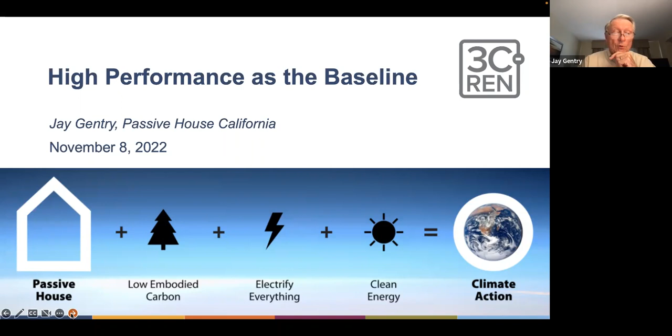I'm wearing different glasses there, but I look about the same, I hope. I went to UCLA. I'm a Vietnam age person, so I picked flying instead of marching. And I've been a marketing and sales consultant pretty much my entire career once I got out of the Air Force. I've been focused on the building performance industry, or the emerging industry, it's now really rolling full tilt, for some years. I'm on the board of Passive House California, and I'm semi-retired, although hardly retired is the way my wife describes it.

I spend most of my time advocating, doing this sort of thing for high performance design and building. Passive House California, in case you don't know, is an organization affiliated with the North American Passive House Network and Passive House Institute, or Passive House International. Our mission is to promote awareness, understanding, and application of the high passive house standards for envelope. We do it through events, education, things such as this, in an effort to get everyone to know and move in this direction, which is an important part of going forward into the future.

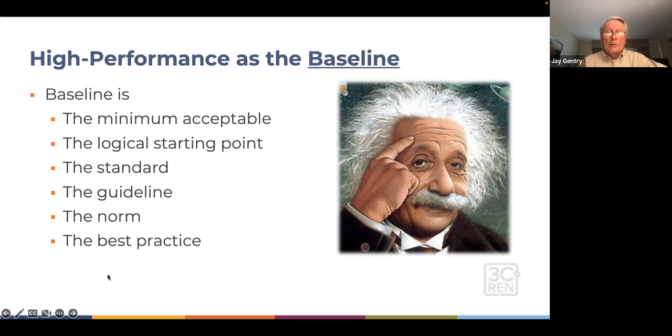I thought it was good to give you something that you can spend a little more time with than just listening to me about it. High performance as the baseline - I found it interesting when I looked up the word baseline and found that it means the minimum acceptable. I love that for Passive House. The logical starting point, that too. The standard to which we should be building things, the guideline, the norm, the best practice - that's what I mean by baseline. Passive House represents a piece, not all, but an important piece for the energy efficiency that contributes overall to sustainability and environmental responsibility. So that's what we mean by baseline.

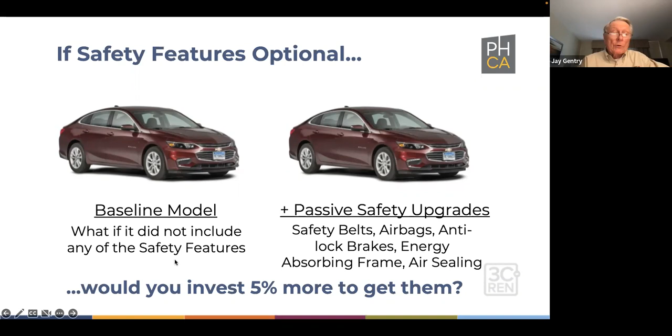Because it's the right smart thing to do, the baseline model includes safety belts, airbags, energy absorbing frame, and many more things. The upgrades you get are your sound system, radio, leather upholstery, video, things such as that. That's what I mean by baseline, rather than the dressed up or fancied up model. The same thing should be true, ultimately will be true for buildings, that the baseline will bring in all of the positive things that make it the smart decision.

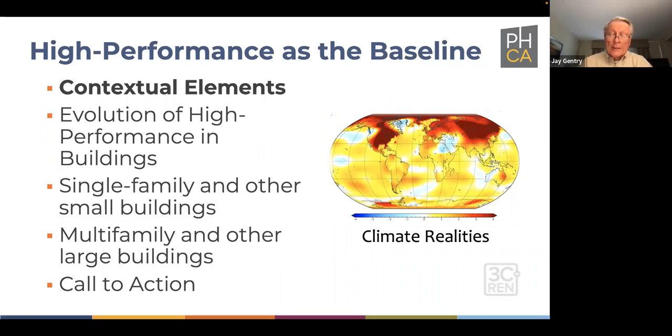Today we're going to talk about, I'll set the context for just 4 or 5 minutes at the beginning, and then we're going to talk about how high performance has evolved, the evolution of high performance in buildings and what the parts and pieces of that represent. We will focus primarily on single family and other small buildings, but I do have some slides on multifamily, and some hidden slides if some of you are multifamily involved and would like to get a little deeper into some things in a climate, if time is available, we can do that. And then the final thing will be a call to action, some things you can do if you're interested and if what we've talked about today makes sense to you as a path going forward.

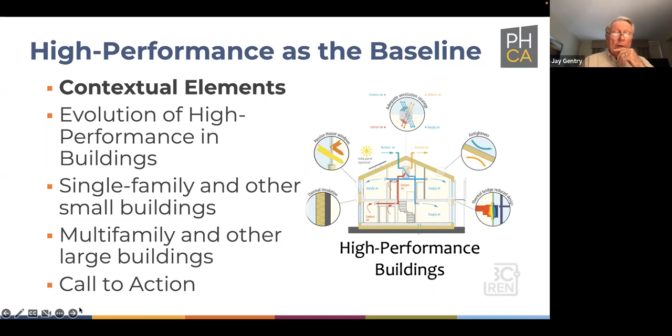The contextual element: high performance is the baseline. A high performance building is generally primarily airtight, thermal bridges removed, airtight including the windows and doors, sufficient strategic insulation that's there, and fresh air ventilation with heat recovery. Those are the things that go into it. Going again into the contextual elements, that's the high performance as the baseline.

The reality is that the climate crisis is here. Greenhouse gases from human activities are a primary issue, and the embodied and operational carbon from the built environment are major contributors. We need to go forward, maximize efficiency, minimize carbon, and shift to renewables. Unprecedented action is what is required now and into the future. You, by being here today, are a part of that unprecedented action, but we have a lot more to do.

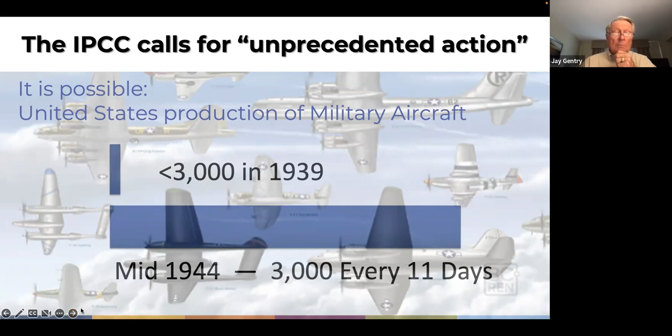A good comparative to that, in my mind, is in the year 1939, the entire United States military produced slightly less than 3,000 military airplanes for military use. And by 1944, we were producing 3,000 airplanes every 11 days. So it is possible. And as we ramp up, we are ramping up dramatically, at least primarily in the developed countries around the world, we're ramping up and headed in the right direction. And Passive House is clearly a part of that.

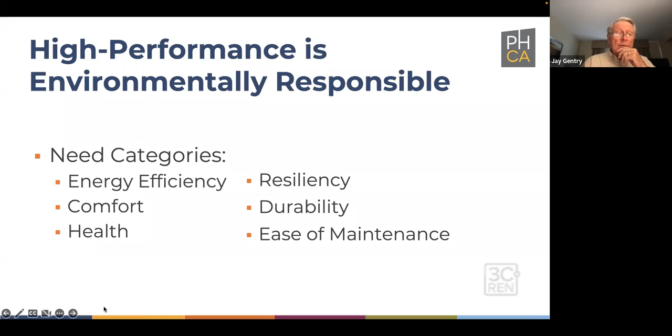The high performance is environmentally responsible, and we talked about this particular thing before. So when we talk in terms of environmentally responsible, there are some categories associated with it: energy efficiency, comfort, health - these from the inside - resiliency, durability, and ease of maintenance are pieces of it that are there.

So for occupants, if you live or work in the building and pay your bills, the energy bills are minimized. It's much more comfortable, both thermally and acoustically quiet. It's a comfortable place to be in a high performance building. You get fresh filtered air with minimized pollutants, allergens, and toxins, and resilience to heat, cold, fire, smoke, and power outages. It is a safer building to live in. So for occupants, it makes sense.

For owners, there's the same operational expense minimized, but the structures are more durable. The mechanical systems, because they're smaller and more right-sized, tend to last longer. Moisture management is very important and much easier when you have the air tightness associated with high performance. Your maintenance expenses are generally reduced, and it's increased fire resistance. So a lot of good things about high performance if you're the owner of the building.

And if you are here, click it here. Or my computer is struggling with going. I don't know if you can see the little spinning rainbow. I'm not sure what happened.

For communities, high performance building communities - there's a community in Colorado that's building back all to passive house because the houses not only all burned in a wildfire last year, the burning transferred from home to home to home. They'd like to get them all built so they're more resilient, because if you don't catch one on fire, it's hard to catch the rest of them on fire.

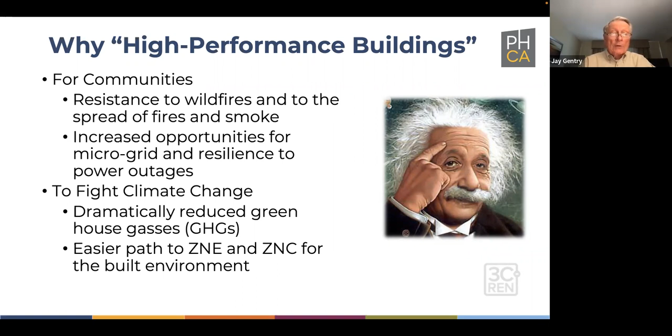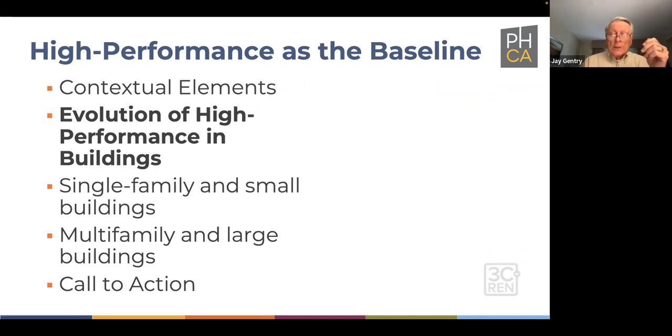We'll now step into the evolution of high performance buildings—how we came around and stepped into this, and into where we're going. It started a long time ago by making intelligent and smart choices about where you live, and it continues on now as we go forward.

Looking at the cave dwellers—if you go worldwide, where they've hollowed out dwellings themselves, what they looked for was, in the northern hemisphere, a high percentage are south facing, because the winter sun is low in the sky and comes in to help warm them during the cold time, while the summer sun is higher in the sky, so it doesn't get in as much and doesn't overheat them.

In addition, they chose locations that provide access to water, comfort, safety, and visibility. I'd point out that a lot of these things are passive, because once they hollowed out the place they were going to live, they could pull up the ladder, making it safer and more difficult to attack, and they could see others coming if they needed to.

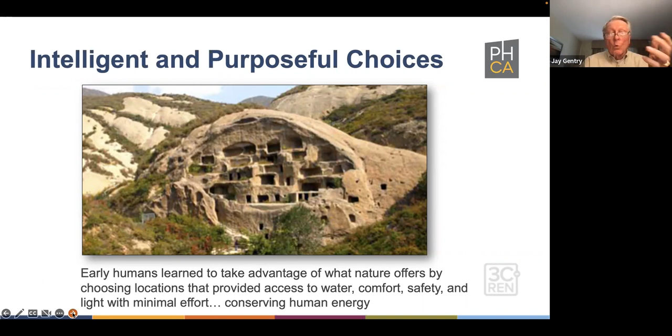So we've been making these intelligent and purposeful choices for a long time, and it was about conserving human energy, staying close to water, and those kinds of things. It was really about survival at that time.

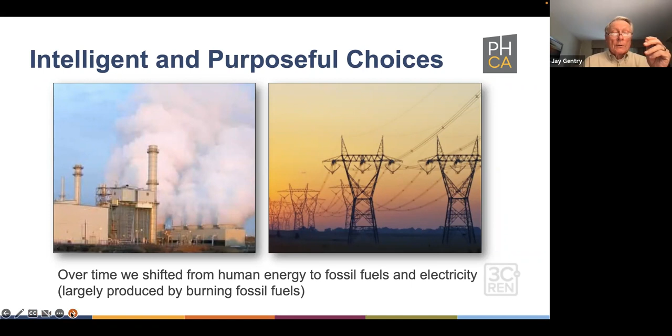Over time, we switched from human energy to energy from fossil fuels and electricity, which is still largely produced by burning fossil fuels. Because of that, we now know we need to do other things—we need to decarbonize the built environment by maximizing efficiency, minimizing embodied carbon, electrifying everything, and shifting to renewable energy. We need to do it because survival is back on the table.

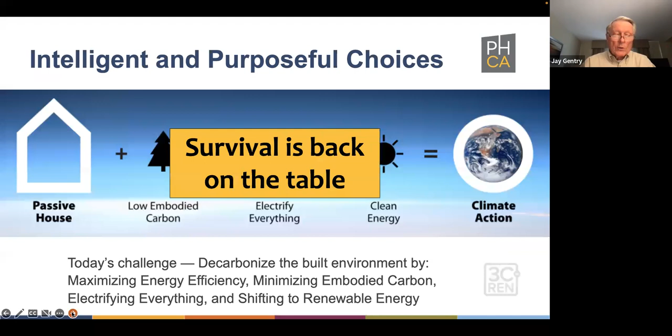This is really critical—one of the contextual things I wanted to bring up, in terms of why we haven't done more, or where we could be had we done more.

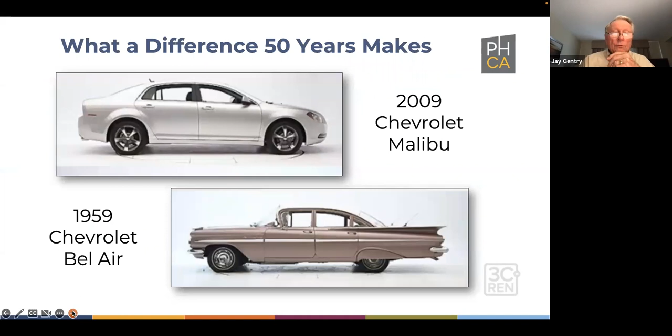You can look this up on YouTube: the 2009 Chevy Malibu crash test against a '59 Bel Air. It's a very interesting video, because the '59 Bel Air is much heavier and somewhat longer, but it doesn't have all the improvements made up to 2009. What you wind up seeing is that the 1959 car is longer and heavier, but the new baseline for code includes all of these safety features.

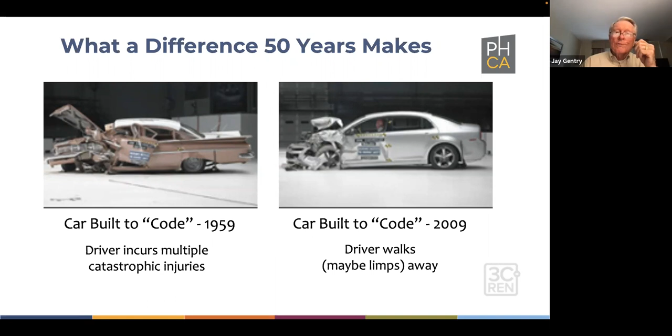The result is that the driver of the '59 car incurs multiple catastrophic injuries in the way the car collapses. But because of the airbag, seat belts, collapsible frame, and other features in the newer car, the driver walks away, or maybe limps away—there might have been some damage to one or both feet.

Interestingly, a key driver of making cars better over those 50 years was the insurance industry, because they wanted lower payouts, fewer fatalities, and similar outcomes. So they insisted on clarity of performance related to goals and objectives for safety.

They applied analysis and incorporated science to achieve performance and different safety things. They integrated innovative solutions, and then made all of the auto companies commit to delivering the expected results. There's no reason we couldn't do that in the building industry, or in home development and construction, as we add the goals of high efficiency and low embodied carbon. We know how to achieve them. It isn't that we don't know how, but we didn't have Ralph Nader and Unsafe at Any Speed to set the stage for the insurance industry to drive and make them happen. We are starting to make them happen, or more than starting, we are moving forward on making them happen worldwide, because it's the smart thing to do.

Setting the right goals, as we've discussed. So it's not driven by regulation yet, but we're getting closer to having it driven by regulation. In terms of the evolution, in the 60s we had the Environmental Defense Fund and Greenpeace, and we were becoming aware that mankind was driving unhealthy and unsafe changes across the planet. But we were thinking it and doing a little bit of action.

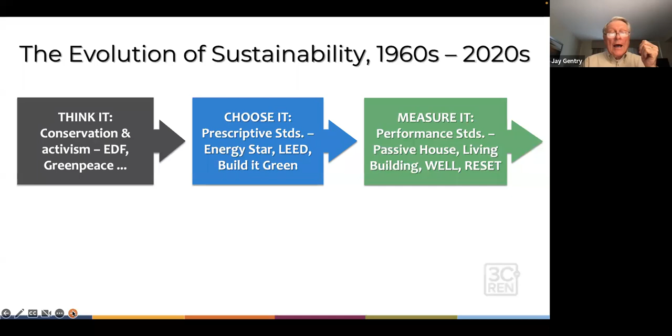And now, just recently in New York, it became, you have to prove it. I don't know if you're aware, but in New York, starting in 2024, even existing buildings—and these are for large buildings, but all existing buildings—will be provided with a budget for the amount of energy they can use to heat and cool the building overall. And if they don't get to that level of energy use, there are fines associated with it that will increase every 5 years going forward.

So they're actually making companies prove it on a year-to-year basis, and the target is high performance, which is the things we have talked about. So from a contextual standpoint, we are past the threshold and moving into the time when we can drive it and really get the unprecedented level of action that is necessary.

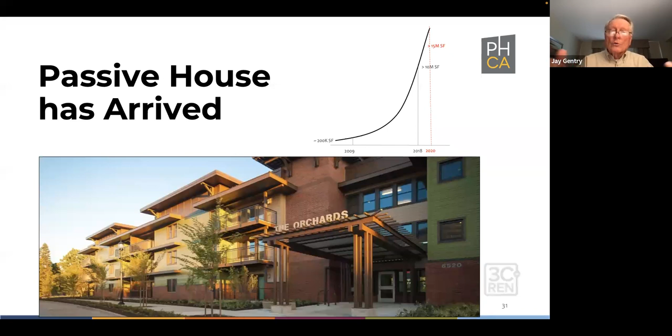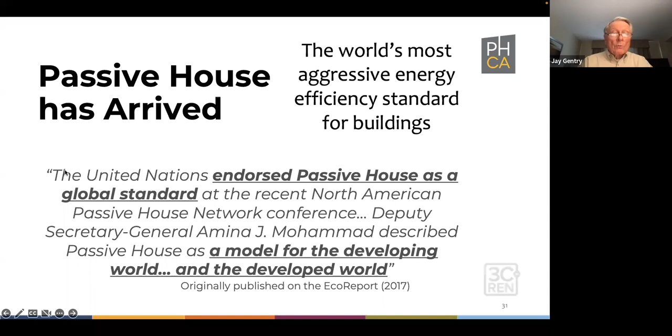Passive House, as I said, is a piece of that. I want to take a little time to share with you, for those who don't know, some of the basic concepts of Passive House and how it works. Passive House is, in fact, the world's most aggressive energy efficiency standard for buildings. A few years ago, in 2017, the United Nations endorsed and recognized Passive House as a global standard and a model for construction and existing buildings in the developing and developed world. This was published in the EcoReport in 2017. So Passive House is recognized as a piece of the puzzle.

Because it's called Passive House, people think of it as a single family home. Some people even think of it as a yurt with a window, because of the pictures of passive houses in really cold climates, where you wind up with generally less glass and things. We now, from a building science standpoint, know how to build to pretty much any style in any climate zone. Certainly in the climate zones we have here in California, you can easily build a passive house to look like any style you're looking for.

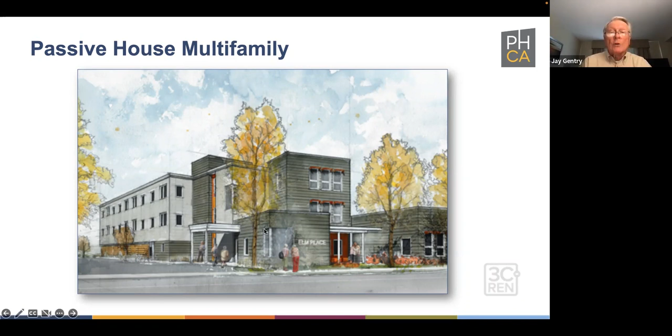And even this one is in New York. This is a passive house building, or passive house block, that is currently under construction.

When it's completed, it'll have 750,000 square feet of mixed use, 655 affordable units, commercial space, and a school. The big picture is this entire city block will operate on less than half of the energy that it would have if it had been built to code.

This is one of the reasons New York is out in the lead. Another reason is that so many people live there without cars, and they live so close and move around through public transportation, that whereas in California the built environment is responsible for around 40% of our greenhouse gases, in New York City it's closer to 70%. So it's a bigger deal for them moving forward.

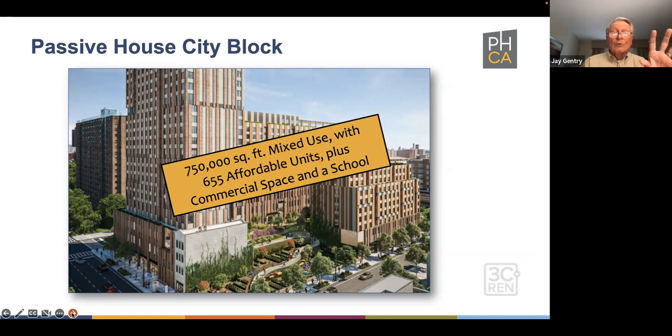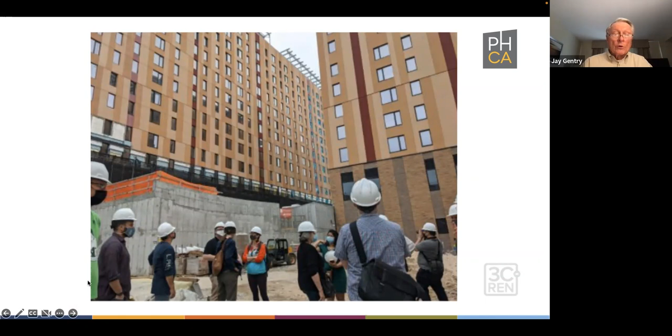And this, by the way, isn't just a picture of what it's going to be like, it is underway. This is from a few months ago. In New York, those buildings are on the way up.

So part of one of the keys to understanding passive houses is that it's passive. I mentioned earlier that when cave dwellers built their caves facing a certain direction and up in the air so you had to come up a ladder to reach them, those were all passive solutions. They built it that way to achieve certain objectives that are automatically achieved as they go. So the natural order of sustainability is to do all the things you can that are passive, that don't have to be repeated, don't have to add power, don't have to be updated or upgraded. They just simply perform the way you want them to perform. So you want to do passive things first.

Because of the airtightness and efficiency associated with it, the active systems tend to be dramatically smaller, and then you go to renewables third. Many solar companies, most in fact, will look at your energy bill and just suggest enough solar to offset it. Whereas the smarter thing to do, particularly for larger buildings, is to look at what you can do to reduce energy use and do that first. Then when the renewables come, you still get to zero, but with a lot less renewables, and it's a better overall solution.

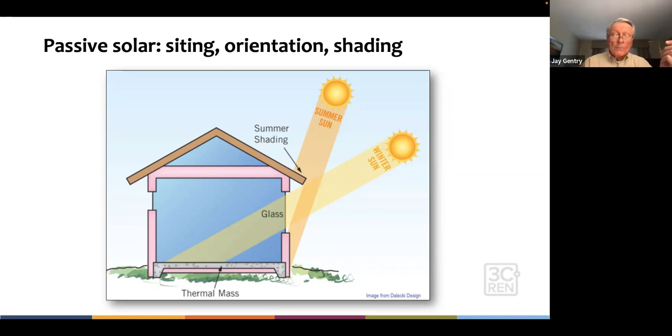I mentioned it with respect to the caves. This is a more specific example: the summer sun doesn't get to the window because of the eave, which was a passive solution. It blocks the hot summer sun and allows the winter sun in when it's cooler, and the solar heat gain from the winter sun can be brought into a thermal mass if you want, so the house stays warmer during the cold day and starts from a warmer temperature during the cold night. It's a smart passive solution because once you design it and put it together that way, you've got it. Passive solutions deliver it naturally as a function and continue to do whatever it is you want.

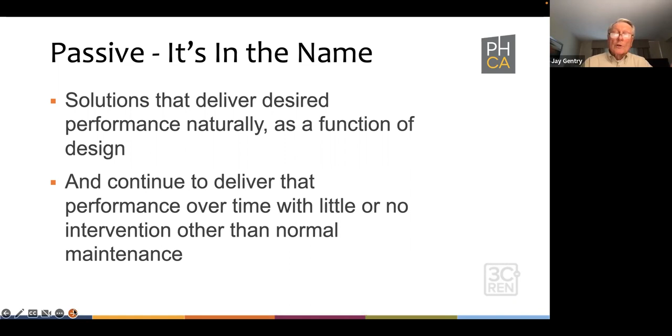I use two examples to talk about that. One is the race car. The wing on the race car performs like an airplane wing upside down, so instead of lifting the car off the ground, it presses the back down, with a little wing in front too, pressing the car down at speed. So the car feels heavier, but it's not—there's more pressure down so that when you turn, it has much better traction. You could get the same traction by putting weights in the car, but then when you try to turn, centrifugal force would tend to pull it offline. So it's an elegant passive solution that makes race cars corner faster and more safely, and it works as long as the car is operating—you don't have to do anything other than put it there correctly in the beginning. The second example I like to talk about is reverse diagonal parking, which some of you have probably seen. It's becoming more common in parks and sometimes city downtown areas.

The goal, in the same way as making the car safer, was to make it safer for passengers when they get out of the car, because when you pull the car in a forward diagonal and park, the bike rack is on the back of the car.

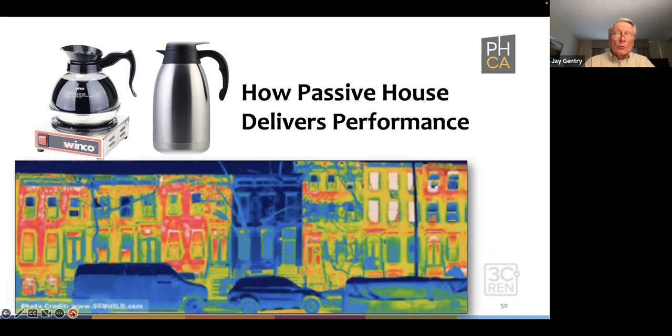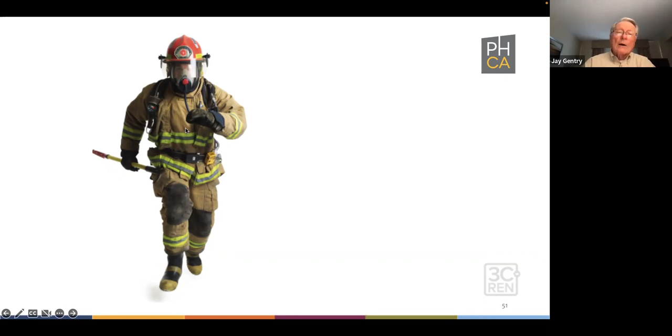How does Passive House deliver performance? It's not unlike the way you get performance if you're a fireman or firewoman running into a fire. To protect you from the hostile outdoor environment, you have personal protective equipment. The same thing is true for an astronaut, although it's not heat that's dangerous, it's the cold and the lack of oxygen. So what you get in both cases is an airtight shell or envelope, with sufficient insulation to avoid the intrusion of heat from outside or loss from inside. Both of these are insulated outfits, if you will.

You could make it airtight with saran wrap, but it wouldn't be much help in a fire or in outer space. The third thing, of course, is continuous fresh air. It's not a wives' tale, but there's an old idea that buildings need to breathe. That's true in terms of allowing moisture to escape so you don't wind up with deterioration on the inside. But buildings don't need to breathe air, the people inside do need to breathe air. So continuous fresh air, and in the case of a passive house with heat recovery, which we'll speak about in a minute, is the smart way to operate.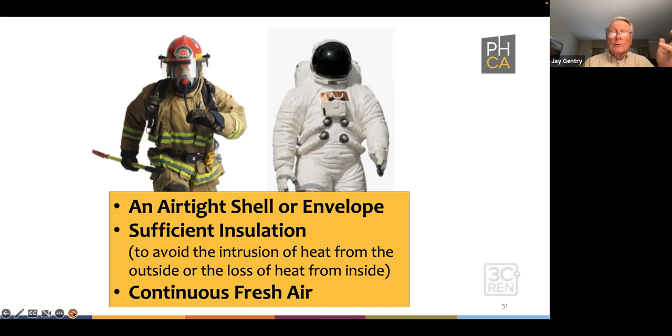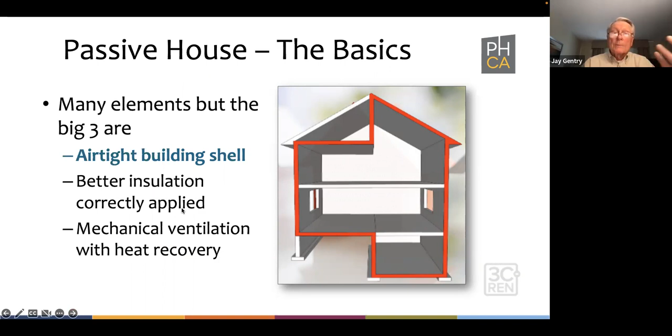This personal protective envelope is personal protective equipment for the people inside a passive house building. The basics, the three key elements: you need to figure out where your air barrier is and create an airtight building shell, including the windows and doors that are part of that envelope, which need to be airtight. The second thing is to get better insulation correctly applied so that you have strategic and climate-specific amounts of insulation going in.

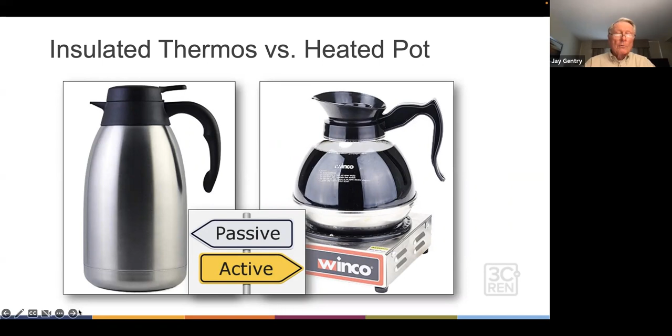As an example of thermal bridges, here are two examples, another passive versus active comparison, where you can have your hot coffee all morning and again all afternoon. You can do it with the thermos, or you can do it with this coffee pot. With the coffee pot, you've all been there when the coffee burned out, and you end up fixing it because you smell it coming from the kitchen. To do these things to the envelope, it's not magic or anything dramatically different from what we do with regular buildings.

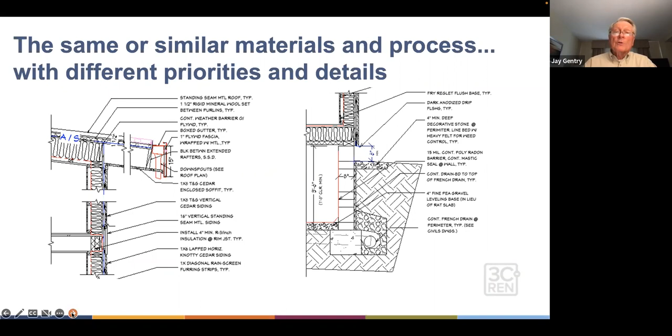It is simply just a bunch of the details that you operate with for the places where it's hard to air seal, the corners, around the windows, at the base of the building. The details associated with the sealing and insulation are important, and you want to get it all the way across. You do the specs as you're going, and you have to communicate how to do this and go forward with the contractors and everybody that is there to do it. But it is not dramatically different.

It is very much like the car in just getting the airbag, the seat belts, the things. Didn't change the appearance or performance of the car. They were simply around doing the right things.

With regard to a thermal bridge, if it's not familiar to you, this one would be: we all know not to pick up an iron frying pan that we just cooked something in without putting a hot pad on the handle, because the handle gets just as hot as the rest of it, since the heat bridges up through the iron and out into the handle.

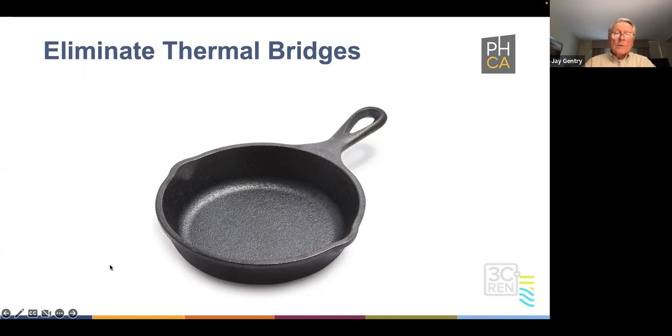That is the case with buildings as well. You can see here the heat bridging out against the top cap around the tops of the windows in particular. You can actually see the heat being generated, bleeding or thermally bridging through the studs.

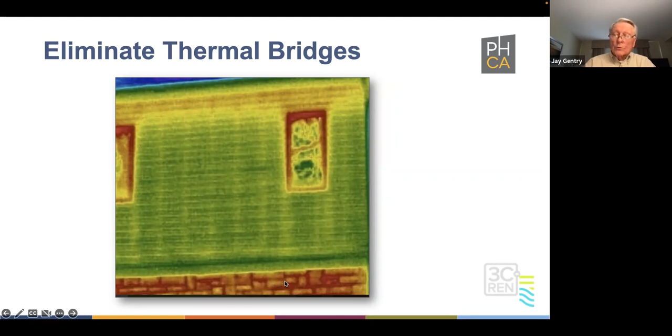And clearly underneath the house, they've got some heat issues, probably some leaking furnace, some leaking ducting, or something that's making it pretty hot underneath the house. So the bricks on the outside, or the stone on the outside, they're creating a lot of heat energy that's being washed through, that's being transferred. So they have to keep doing it over and over again.

So the second of the two big steps is strategic insulation correctly applied. And that's without thermal bridging. So you need to eliminate the thermal bridging. And the passive house planning package is one of the few places where you get that opportunity to do it.

The third step, because people need to breathe, you need fresh air inside the building. So you get mechanical ventilation with heat recovery. And generally you take the warm air inside out of the wet rooms, like the kitchen, the bathrooms, the laundry room. It passes through a heat exchanger.

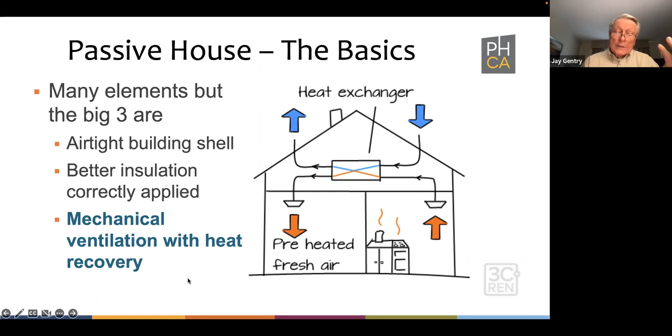So this hot air passes through the heat exchanger while the cold air from outside passes through the same exchanger. They don't mix. So the moist, polluted air that's going out, that air goes out, but the heat from that air transfers to the air that is coming in. And that's called a heat recovery or energy recovery ventilation system - that's what does that.

As you look at it here, the extract air from the stale air rooms that's going out exhausts, and the air from outside comes in.

To get an idea of it, if you have a 90% efficient heat or energy recovery ventilation system, and it's 70 degrees inside with 30 degrees outside, that 30-degree air, when it comes in, is warmed all the way up to about 66 degrees. So you're really only having to deal with a few degrees of a little bit of air that is providing, however, continuous fresh air to the inside of the home. And the air that's going out, of course, the temperature drops down in the air that's going out.

And I have two other things here. Because it's coming in, once you have an airtight building, you can control the air quality. You have complete control of it. So you can filter it to whatever level you want to. And something that's happening now quite a bit across the West is you're having a basic filtration system which works for regular times, and if there's smoke from wildfires or something else that you need to get out of the filtration, you can shift over to having the air coming in filtered through a HEPA filter, getting not all but by far most of the smoke out.

And so you think, well, this is not passive, this is active, it's going to take energy to run it, and that's absolutely true.

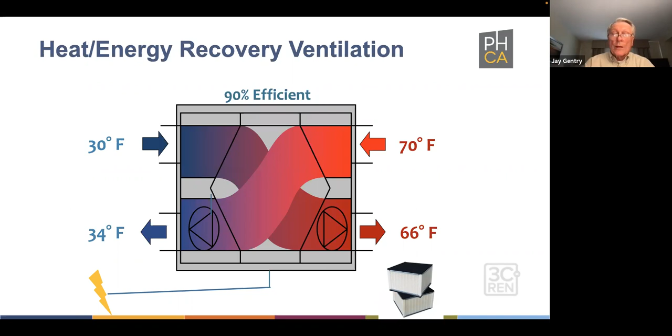Because you're transferring a small amount of air at a slow speed, just to get continuous fresh air inside, that air isn't moving fast. For a 1,600 square foot home, the energy required is equivalent to about a 40 to 60 watt light bulb. So it's very low powering of the fan, and the heat transfer takes place in a passive system structured so that as air passes through the tubing or plates, the heat transfers without the air itself mixing as it goes through.

The 5 key principles - I mentioned the 3 things: airtight, insulation, heat recovery ventilation.

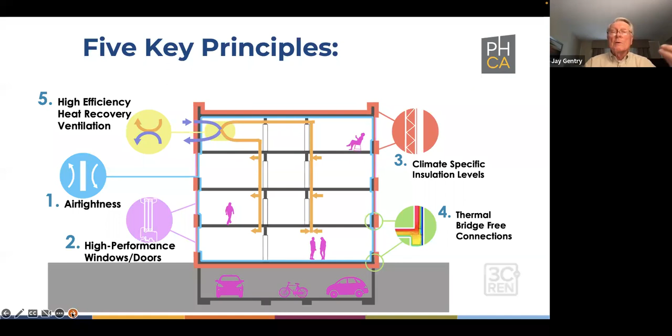Just so you know, I used a small house as an example, but here's a 4-story building. Again, you've got airtightness with high performance windows and doors for continued air tightness. You've got climate specific insulation with elimination of thermal bridges, and high efficiency heat recovery ventilation. So you can do it in buildings of any size - it's the same 3 main things or 5 key principles.

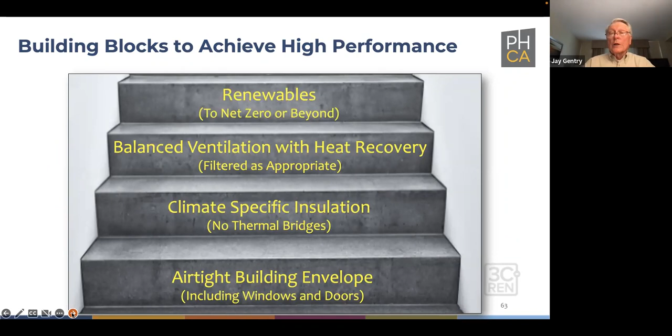A way of thinking of it is as the building blocks to get to high performance: the airtight envelope, the climate specific insulation, the balanced ventilation which is much healthier with heat recovery, and then you can add renewables - it will take a smaller amount of renewables to get you to your goal of minimizing energy use.

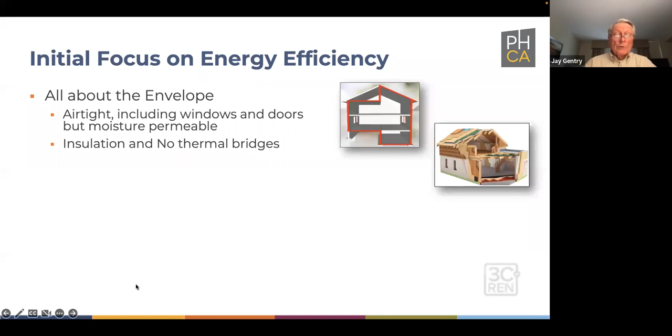The initial focus of energy is on the envelope, and this is kind of a repeat of what I just said - it gives you control of air quality, and it also provides resilience to heat, cold, fires and smoke from fires, and power including power outages. So when you focus on energy efficiency, you get a great start, and there are many other things you can do to make it more sustainable.

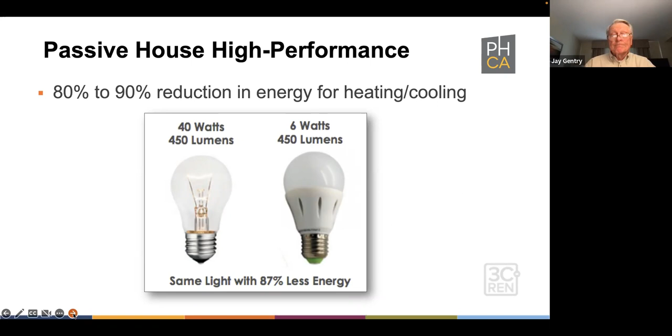A passive house will have about an 80 to 90% reduction in energy required for heating and cooling, which is a similar drop, by the way, to the drop you get between an incandescent light bulb and an LED light bulb. So we know how dramatic it is.

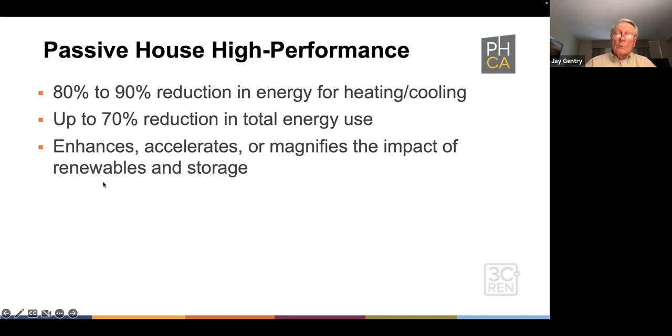A big motivator is the 95% reduction in unwanted infiltration of airborne pollutants and allergens. Because air is not leaking in much at all, you dramatically drive down the allergens and things floating around. In fact, if you've ever been in a passive house, find a window where sunbeams are coming through and see if you can find any dust motes floating in them - there are very few.

If you don't have pets, you can go a long time between opportunities to dust. And you've got the comfort, the healthy indoor air quality, durability, resilience, et cetera - those are all the benefits you have.

By the way, if it's not hot, cold, windy, pollen-heavy, smoky, or noisy - if none of those things are going on and the weather is fine - it's perfectly fine to have all the windows open and fresh air in a passive house. You don't have to keep it sealed up all the time, just when you have hot, cold, windy, pollen, or other things you're trying to avoid.

As it turns out, people who own passive houses generally wind up not opening the windows much, simply because you'd typically open windows due to stuffiness or some other reason, and it's always 70 degrees upstairs, downstairs, no drafts - that sort of thing inside a house built to these kinds of standards.

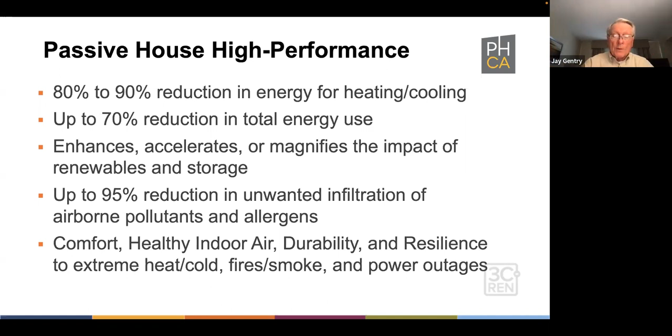We mentioned resilience. Resilience is really important now because of the heat and cold, climate change, the wildfires that are caused, the smoke from those fires and other air pollutants, and power outages.

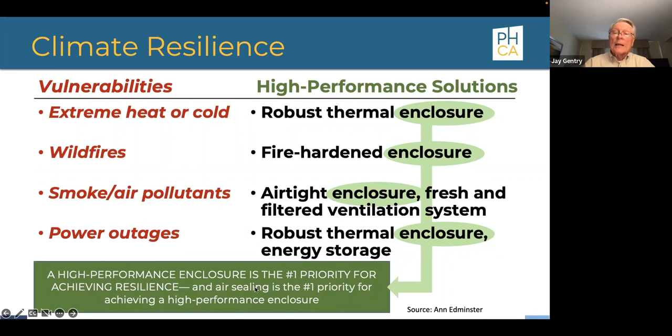So that takes us through the evolution of high performance and how we got there. We've been talking about single and multifamily up to now. Let's turn our attention to single family buildings for a few slides to get to where we need to go.

We've seen individual small buildings and we know we can go to larger buildings. The way we've built houses in the past is we treat it like a relay race: the owners who are going to live in the home know how many bedrooms and bathrooms they want, how it should be laid out, room for the pool table, and so on. They have their preferences and realities that they're interested in, and by realities I mean what their budgets are and what they can let happen.

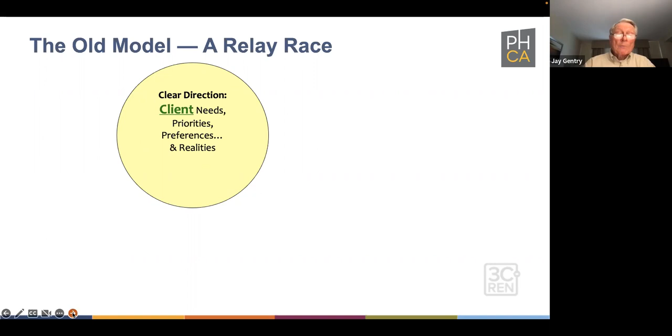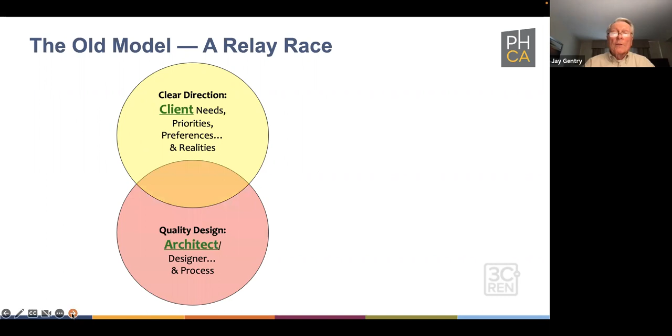The next step is to get somebody to help them with the design. They'll find an architect who will listen to their needs and help design a building that meets those needs and heads in the direction they're looking for. Then they put the bid out to multiple builders, so they get a builder who translates this vision based on the planning documents, interprets the plans, handles surprises going forward, and executes it.

What we now know, and what's proven, and what we're shifting more and more toward, is instead of the relay race, treating it as a team effort. Because if the client, the architect, and the builder meet together—you can have multiple builders come in one at a time to learn about it, if you want to select among say 3 recommended builders, that's fine—but selecting the builder during this process is much better, because when everyone is aligned, the vision of what the house is going to be and how to get there is achieved much faster and much more completely.

You wind up getting the house you were looking for at what you could afford to spend, because often an architect will design something beautiful and appropriate, but without the contractor's knowledge of costs going back and forth, it's difficult to maintain the budget level you're looking for. The biggest surprise working in this process, and has been for years, is the cost differential between what you were hoping for and what the reality turns out to be. It's just a smarter way to do it.

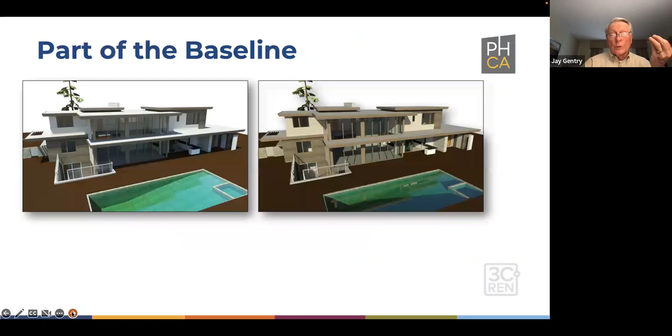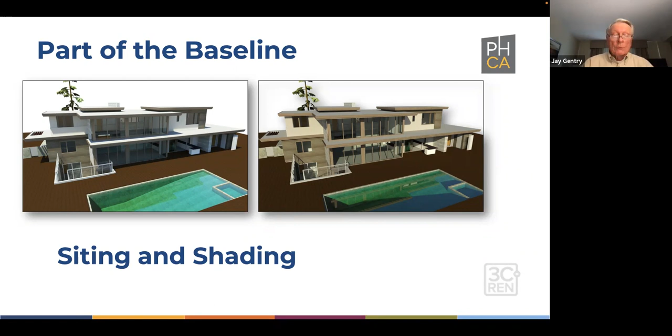We talked about part of the baseline being siting the building and shading it so you take advantage of the winter sun and its warmth, but avoid the disadvantage of the summer sun and the heat that comes from it. So siting and shading is one of the things you can think about.

Part of the baseline is also the actual shape. If you design a simple building and minimize the surface area, corners, and perimeter, it makes it much less expensive and much easier to build. For example, in this building we have 4 corners, and we'll call it 100% of the surface and 100% of the perimeter. The more surface area you have, the more insulation you need on that surface area, and sometimes increased insulation, because you've got more opportunity for heat to transfer out or in.

If you take that same building and just add one little corner jutting out, you wind up with 8 corners—you double the number of corners you have to deal with.

You added about 10% to what you need in terms of the area you need to insulate, and the perimeter necessary to go around it. The perimeter is the whole area that needs to be air sealed, at all the corners and things going through. If you take an even more complicated shape, you wind up with 3 times the number of corners you've got to keep sealed, 120% of the surface you have to make airtight, and 130% of the perimeter, plus extra insulation, because you've got more ways for the heat to leak out through transfer.

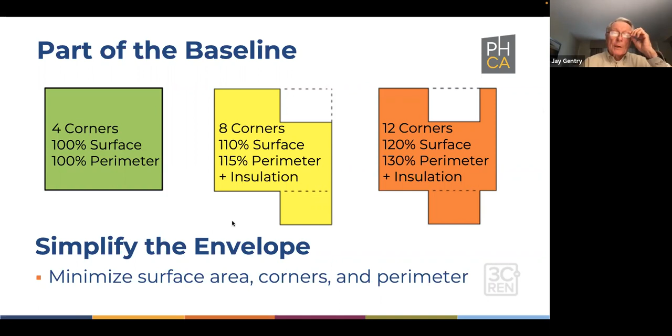A builder I work with likes to say it's easier to keep an elephant warm than a snake, because of the surface area.

Another part of the baseline is thinking about windows. You want to make smart window choices, as opposed to treating windows as just a decorative part—not that they aren't decorative too, that's just not how to start. Windows should give you daylighting and better lighting without having to turn lights on all the time during the day. You can get fresh air when you want it, you get the views you're interested in, you have egress requirements, and air tightness.

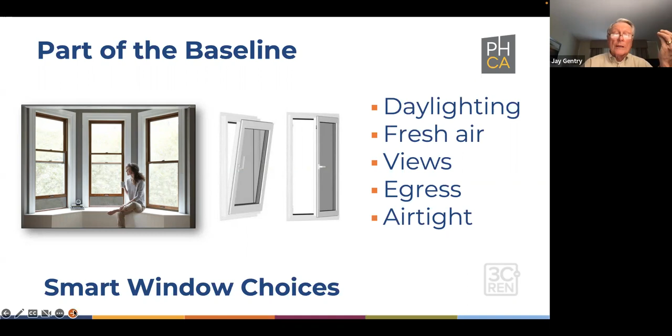The windows here are double hung, and they're beautiful in this bay orientation, but it's much more difficult to get airtight with a double hung window like this. Tilt and turn windows are where we're generally headed with respect to passive house or high performance.

A couple other things. Another part of the baseline is what's available. For example, prefab construction, where they build the walls, ceiling, and floor to the air tightness and insulation standards you're looking for, and there will be raceways inside along these walls so you can run electricity and plumbing without having to penetrate the envelope and risk leaks.

So that's something. Another one is cross-laminated timber, because it's a wood product, and wood—trees—sequester carbon. You're taking carbon that, when the tree is cut down, would otherwise be released if you let it rot or burn it, along with the smoke if burning. But with this approach, it's actually carbon negative for embodied carbon, because you're saving embodied carbon as you go.

And both of these, by the way, are passive solutions, because once you build it that way, it stays that way and performs that way.

So thinking now in terms of the baseline, we typically think of high performance as an upgrade. You have a code compliant building, which is a nice building—in California it's nicer than other places. You can't see any changes. And if you want it to perform better, airtight, with better insulation, heat recovery and things like that, you might have to spend a little more.

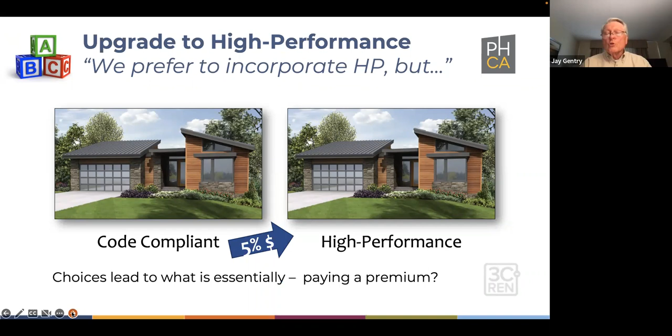In fact, we're in the position of saying that the choices you make essentially lead to paying a premium. But if you take the approach from the two houses we saw earlier, and say we're going to make the baseline the state-of-the-art performance, the state of the science performance—build it to be as efficient, comfortable, healthy, and durable as possible—then if you don't want to do that, there are some things where we only have to get to pass/fail minimum standards.

Code is essentially the elimination of defects. Quality is more than the elimination of defects. You could go down, reduce performance, but you're in the position of asking your client: you can choose to reduce costs, but you're going to have to give something up. Which would you like to give up—energy efficiency, air quality, comfort, resilience, resale value, peace of mind, durability?

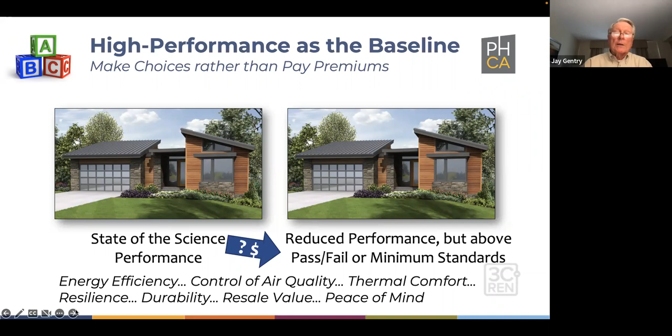People love to win, but they hate to lose and give things up. So as we begin talking about and designing buildings to the high performance level, most people will stay with that because they don't want to give up anything. So that's the main thing of the workshop, or the webinar, we're doing here.

And I've included in the handout another epiphany that makes that case, so you'll have an easier way of making it yourself if you want to later.

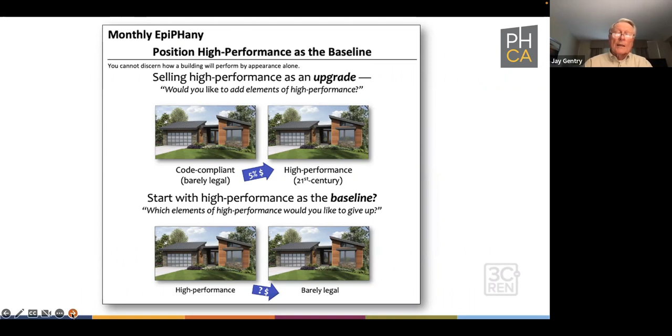As we move to large buildings, multifamily buildings, and other large buildings, we can talk about this. The passive house is scalable. You can have it as an ADU, it can be a small building, it can be this building we've talked about here, or all the way to a city block.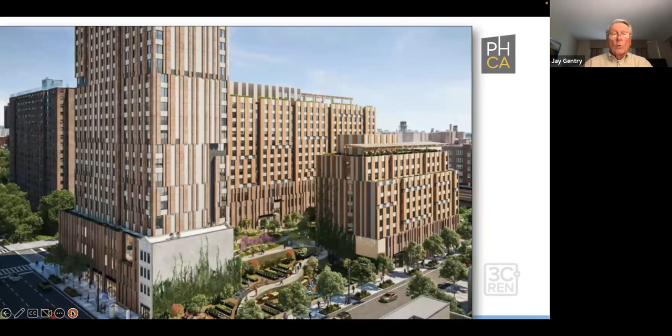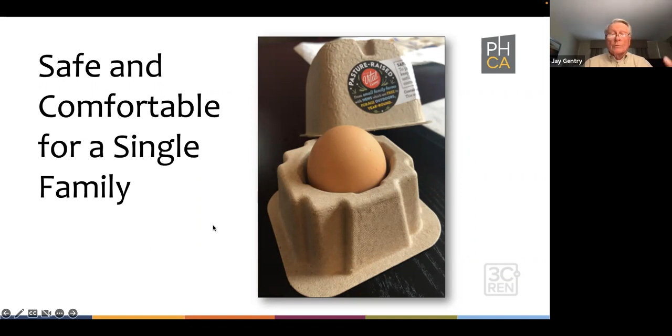If you take the analogy that the egg is what we're protecting from too much heat, too much cold, bad things happening to it, you enclose it, and that's an enclosure, and it's going to cost a little bit to do it. If you have a dozen of them, it's going to cost a little bit on each of a dozen. But if you put them in a multifamily context, you can achieve the same things. The airtight portion and the insulated portion are only necessary around the outside envelope. So it's possible to build passive house multifamily buildings that do not have to cost more.

These are 3 actual passive house certified multifamily buildings. They're code compliant and airtight. If you take code compliance versus passive house — and when I say passive house, I could just as easily say extremely efficient, because passive house is all about efficiency — it's achieved with the envelope and the handling of fresh air, but it's all about efficiency.

Here is a study done in Pennsylvania. The Pennsylvania Housing Finance Agency, back in 2015, said, 'We'll give you 10 extra points on your RFP response if you'll pursue passive house.' So they started out, and now have 194 conventional and 74 passive house buildings, built over the years.

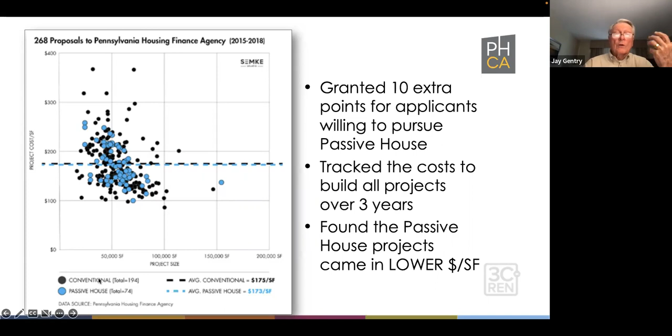What they found was that the first year, the two blue ones here, it was about 5.8% more expensive, because the contractors and builders didn't know exactly what to do — it was a first time through for them. The second time they built buildings, it was about 1.5% more, because they learned a lot. And by the third and beyond, it's actually less expensive to build a passive house building.

And that's not all about performance. That's part of it for the architects, because they understand the simplicity and advantages of fewer corners and decorating. The idea is we want to do that for the people on the planet. The question isn't why would you build high efficiency — the question is why not?

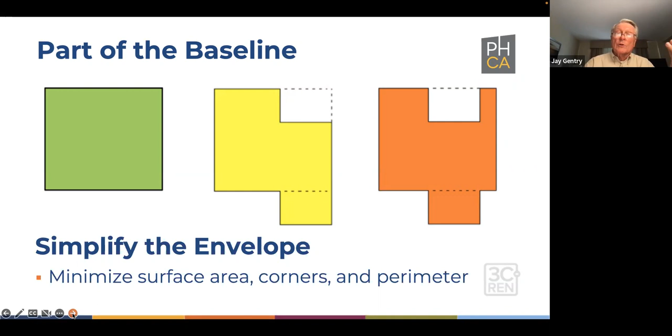The architects have learned about the simplicity, and they tend to build buildings that are supposed to be super energy efficient more efficiently. They know about the windows, and instead of decorating using the envelope, they could take the envelope and decorate the envelope itself. And they have the same considerations for windows in terms of why the windows would be there.

So imagine wrapping a package. A box like this is pretty easy to wrap and make it look really nice. You can even get fancy with it and make it look terrific, do really special things. But if instead of building it as a simple six-sided thing, you're decorating it after you build it in terms of the concept, it's much more difficult to get the tight fit, the airtightness, and all the things associated with it. So we don't want to do that — it costs you money.

The new baseline in multifamily buildings is what I call evidence-based performance — knowing before you start what you're going to get. The greatest trend, from a group that does this kind of work, is that they want to know how it's going to perform before they spend the money to build it. It's not good enough to design for it — they're demanding proof of performance and operations as it goes through. So I've got an epiphany for this as well to talk about.

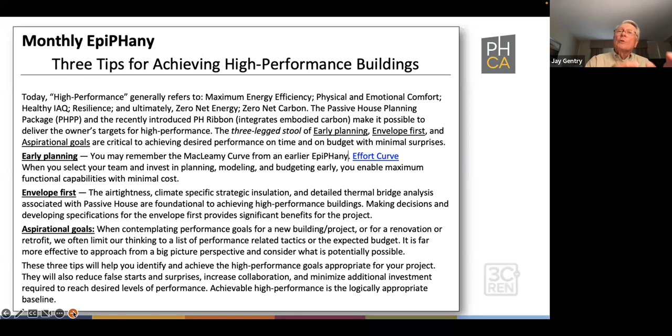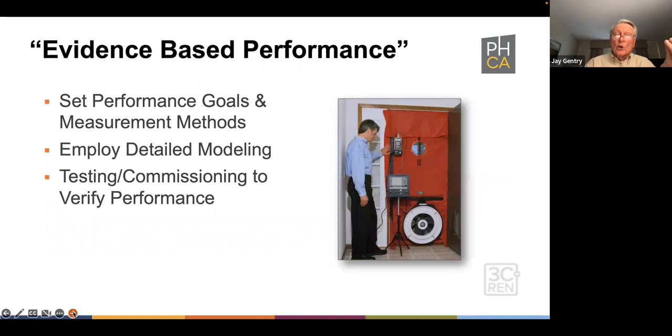You've got to start your planning early, build it around the envelope first, and then aspirational goals. Do it to a high level if you can, because if you plan it to a high level and have to back down, you wind up with a much better overall than if you just build up to what you think you can afford. So you set performance goals and measurement methods, employ detailed modeling early.

If you're not familiar with it, there's a link to it in one of the epiphanies. Patrick MacLeamy was with HOK Architecture, and he came up with the idea that traditionally the big spending in terms of the design and getting the things from the MEP engineers through it, the hump and where you spend the money is out here. But if you moved all of these things over here to where the green is, it doesn't change the total cost at all. It simply gives you a much higher ability to control that cost and to make design changes to get it right early in the process.

So what you're looking to do is begin with the end in mind by knowing what you want the performance to be and how you're going to monitor and measure that performance. Then you detail the modeling and do the budgeting so that you can make early decisions at a high control, low cost point. And you can also inform value engineering along the way. When people say, yeah, we could change it and save this much money, you can look at what it would save, but also what it's going to cost in terms of performance and month to month going on.

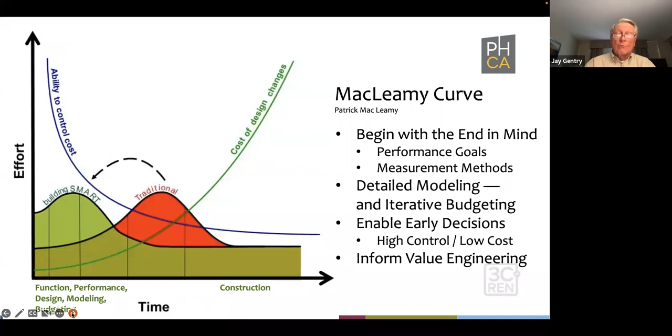This is also true for remodels, in that for a renovation project, if you start with what is possible and adjust down to the realities of time and budget, you achieve a better outcome with reduced risk and fewer surprises. So getting all this figured out in the beginning is a key step to where we're trying to go.

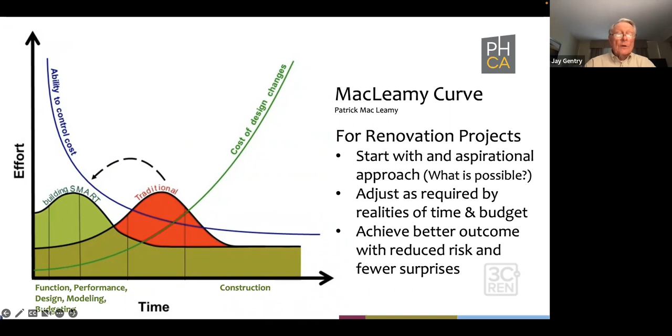To get this in the single family, I mentioned the vision you saw come together. Within a multifamily, you want the architect, designer, the major consultants and subs, and the contractor all a part of the integrated team that figures out how the building should perform. And then you work toward that.

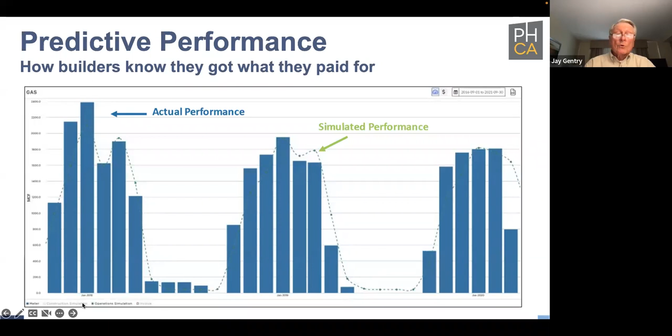And as, again, if reality causes you to back down, you still get to a much higher level of performance. And you get this evidence-based performance - this dotted line being the modeled performance of the building for 3 years, and the bars being the actual performance. So that's where you want to go if you possibly can.

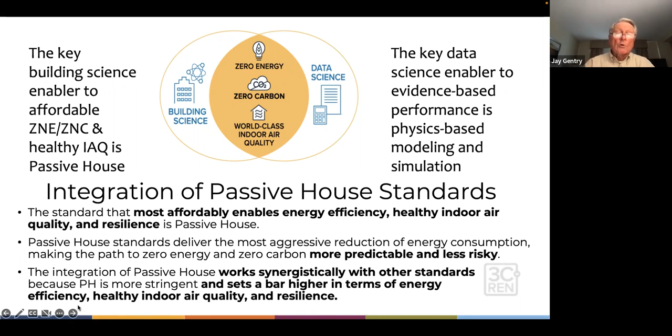I've been pitching Passive House, but not as an alternative to LEED or Living Building or different things that you do. I'm talking about it as an addition, as an integration, because it works synergistically with the other standards - it's more stringent and sets the bar higher in terms of energy efficiency, healthy indoor air quality, and resilience. You get a much better result without changing any of the things that you do, other than focusing on the envelope early and getting the high performance there.

I use an analogy to talk about this. Imagine if you were putting together a football team, you would want to find the best players that you could in every position. You would know the parameters around how much they ought to be able to bench press, how fast they are, and how well they catch, depending on whatever position they were in. That's very similar to a design build team using LEED and Cal Green.

For example, that's the most frequently used standard with multifamily buildings here in California. These are point accumulation things that reflect required desirable levels in lots of different categories - in terms of water, toxicity, or all of those things, which are all important, very much like the high performing players in a football game or on a football team. But having all the good players isn't going to win very many games unless they have a playbook that integrates what each player does on all the different plays. They have to work together as a team in order to have the plays work and function.

Not just working together as a team with the playbook, they'll have a game plan to play offense or defense against a specific opponent to get their desirable outcome. The corollary from a design build team standpoint is to bring Passive House into the picture, because the Passive House planning package integrates all the elements into a predictive model that forecasts the specific performance you'll get, and gives you a game plan to make informed choices to achieve your goals cost-effectively.

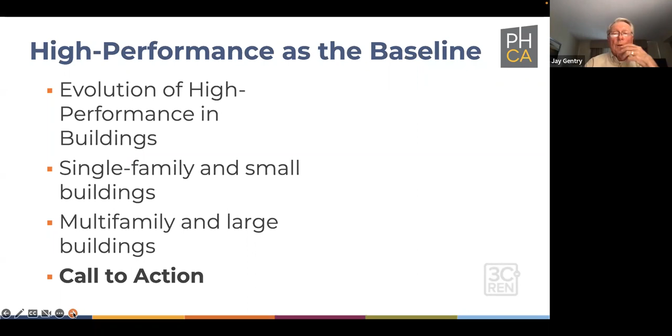So it's the next step in getting smarter as we head in that direction. High performance as the baseline is where we started. Now the call to action: things I would ask that you consider, or raise as possibilities, as you go into the future to help us get to where we need to get to.

We've learned from studying Vancouver, New York, and several cities and areas of Europe to identify who the leaders are, set higher targets, support the front runners, educate everyone, remove barriers, and increase incentives. The ones all of us can be involved in are educating everyone and proving it with pilot projects. Once you show it and it works, everybody wants to do it.

If you know of any organizations or groups that might benefit from learning more about building blocks of high performance and need a presentation, reach out to info@passivehousecal.org, and I or somebody would be happy to make a presentation tailored to the specific architectural firm, solar firm, or whatever it is. Getting everybody educated about what is possible is an important first step.

In terms of pilot projects, if you're aware of or have ideas for buildings, pilot projects, things that could happen or are currently on the horizon, again reach out to us, because we'd love to be in touch and help whoever's trying to do that get it working the way we want it to, or the way they want it to.